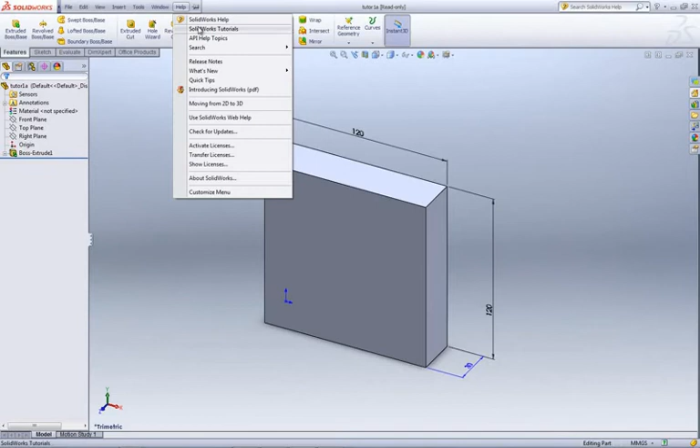To gain more insight on the tools and features of SOLIDWORKS, you can access the SOLIDWORKS help and tutorials. To access these, click the Help drop-down menu and select either Help or Tutorials. If Help is clicked, a new window appears. In this window you can find helpful information on topics listed along the left, or simply type whatever you're looking for into the search bar. Clicking Tutorials also brings up a new window. The tutorials built into SOLIDWORKS can be a useful resource for practice or review.

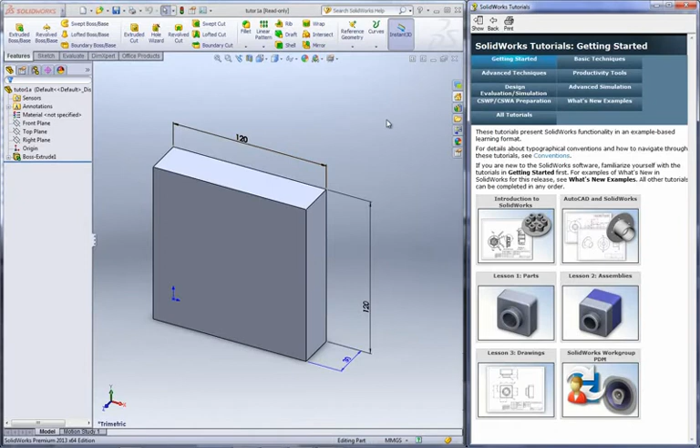Let's return to SOLIDWORKS and familiarize ourselves with the user interface. The most commonly used tools for creating three-dimensional CAD drawings are all located in the Command Manager. Hover over any of the icons for a brief description of what they do. On the left-hand side of the screen, you'll see several of SOLIDWORKS menus. You'll find the Feature Manager design tree, the Property Manager, the Configuration Manager, and the DimXpert Manager. You'll see how to use these menus later on in these tutorials.

By default, SOLIDWORKS has many toolbars open, such as the task pane. Depending on what you're using SOLIDWORKS to model, you may need quick access to different toolbars. To view or hide certain toolbars, right-click anywhere on the Command Manager and select the toolbars you want to make visible. You can also drag the toolbar to customize its location.

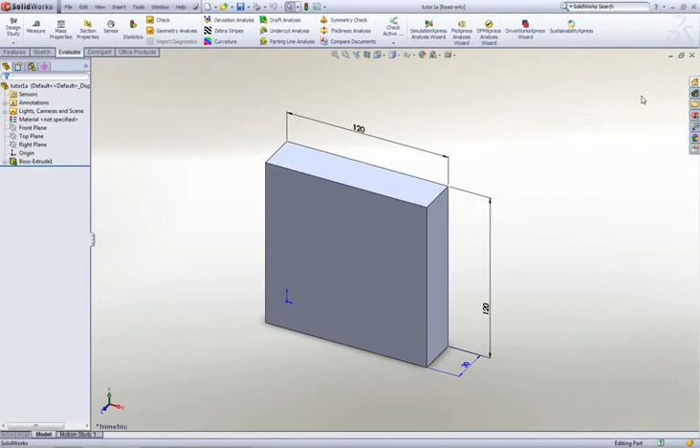Each part's characteristics and dimensions can be changed by accessing and manipulating the properties of that part. For example, to change the thickness of this part, right-click and then click the Edit Feature icon to open the Property Manager. Here you can change the depth to 100 mm, for example. Click the green check mark on the Property Manager, or on the top right of the graphics window to apply the changes.

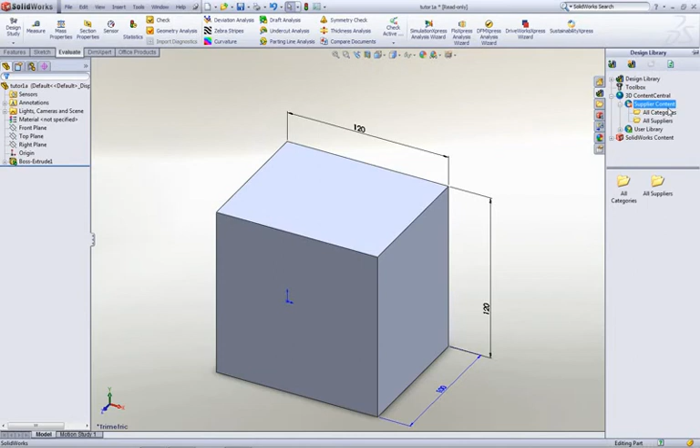An attractive feature of SOLIDWORKS is the 3D Content Central database. This is a very large database of three-dimensional parts and assemblies that have been collected from SOLIDWORKS users worldwide. To access the database, locate the Design Library in the Task pane, expand the 3D Content Central tab, and double-click on the supplier content. Now open the All Categories folder, and then double-click on the web icon. Now you have access to thousands of pre-made SOLIDWORKS parts.

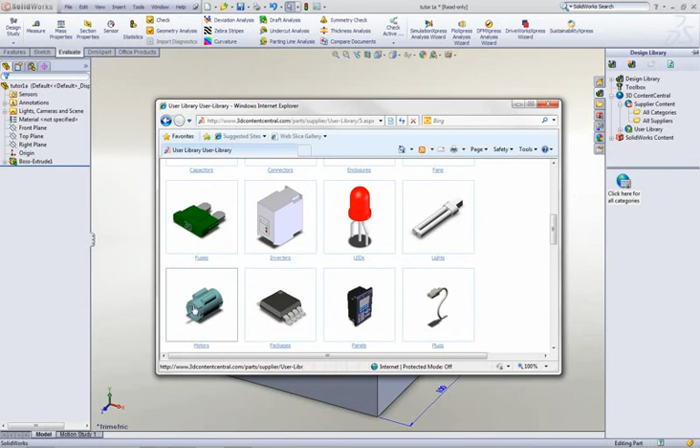You can also locate a part based on the type of industry that uses it. Just click Community Favorites and select the desired industry. For example, click Electrical and then click Motors. You can download any of these motors by selecting the one you want and clicking Configure and Download. Note that you will need to register to gain access to the content. If you have already registered, enter your login information and click Login.

You are automatically returned to the selected part and are now ready to open it in SOLIDWORKS. This part can be downloaded in 3D or 2D format. In this case, select 3D. Next, deselect Zipped so that once it's downloaded, you can directly drag the part into SOLIDWORKS. Once this is done, the part can be modified or used as part of your projects.

In this lesson, you learned about the user interface in SOLIDWORKS. You learned how to open existing parts, as well as how to access the built-in help and tutorials. You also saw some commonly used tools, part properties, and were introduced to the 3D Content Central database.